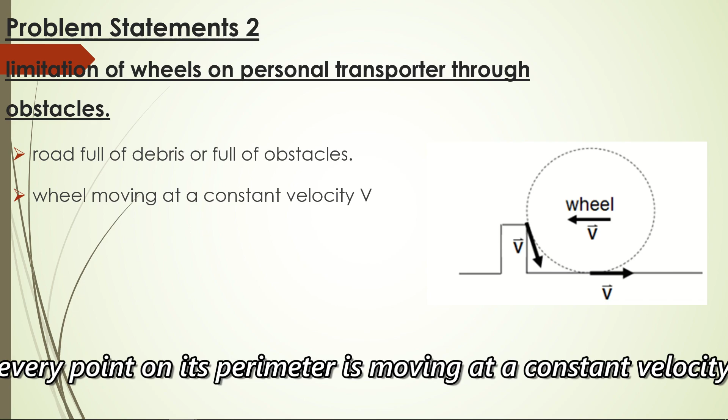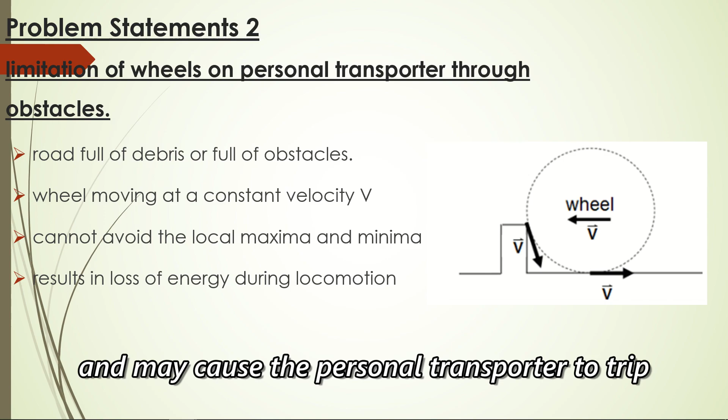In this case, the wheel cannot avoid the local maxima and minima and must move over the obstacles. This results in the loss of energy during locomotion and may cause the personal transporter to trip and cause severe injury. Therefore, it is very dangerous when a personal transporter is traveling at an average of 15 km per hour.

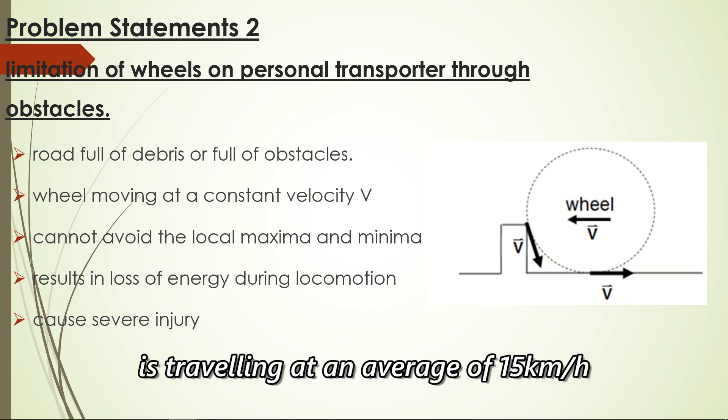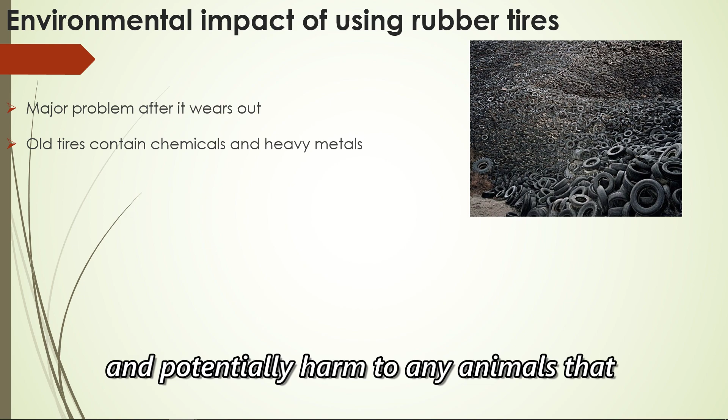Last but not least, the majority of the tires are made of rubber. Tires may be very useful to us as they help us to travel from place to place, but it may also be a major problem after it wears out. The biggest problem with discarding old tires is that they contain chemicals and heavy metals that leach into the environment as the tires break down, potentially harming any animals that come in contact with the poison water.

Besides that, some disposal sites have tried to get rid of old tires by burning them up. These processes not only release harmful chemicals into the air, but they are also extremely dangerous to the workers and the environment. Moreover, fires that are fueled by tire materials are harder to be controlled and extinguished than regular fires.

Therefore, we have to propose a great solution to solve this serious matter.

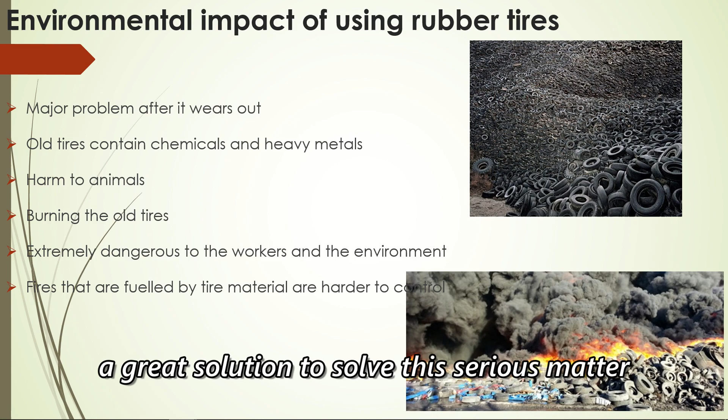Next, I would like to discuss the implications of the problem. Based on the previous problem statement, why do we select personal transporter to replace the use of vehicles? This is due to the negative impacts of vehicles.

First, harmful gas substances. Then, lack of accessible parking is also a major problem for vehicle users. Whether at airport, shopping center, or university campus, problems with parking are an everyday occurrence. Lack of accessible parking can hurt local businesses and decrease the quality of life. Traffic congestion is also a main negative impact as well.

With the help of personal transporter, the high mobility of personal transporter can be helpful on insufficient car park issues. Personal transporter is available to carry into your office and houses and store it somewhere until you are prepared for your next destination. Other than that, the fuel consumption of personal transporter is zero.

Hence, the emission of harmful gas substances will be resolved. The existence of personal transporter will reduce the number of vehicles and efficiently resolve the traffic congestion problem.

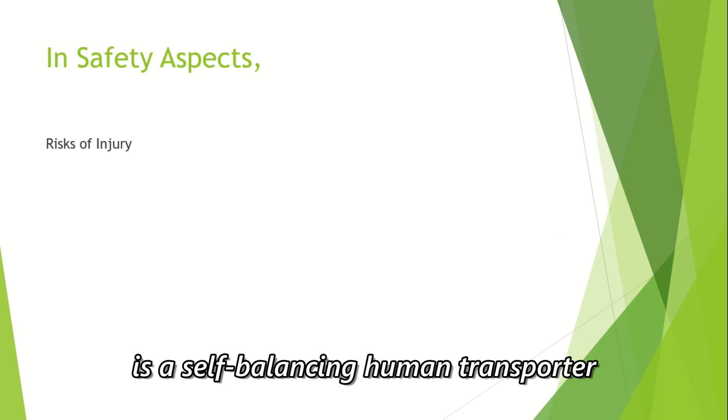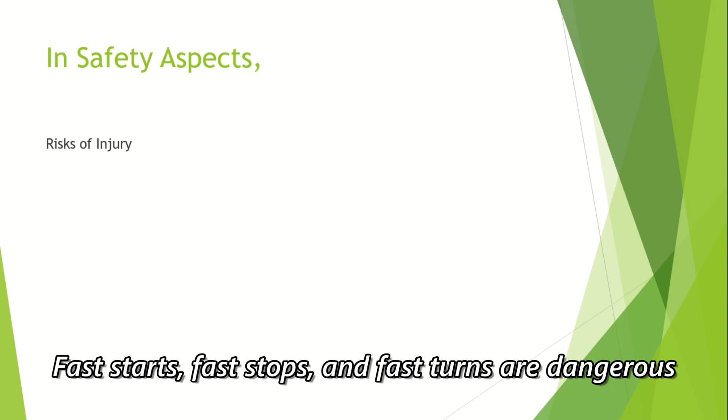In the safety aspects, the wheel mechanism of personal transporter is a self-balancing human transporter. Balancing technology cannot prevent injury if you do not ride it safely. Fast starts, fast stops, and fast turns are dangerous and can lead to a loss of control, collision, and falls.

According to a George Washington University study, personal transporters are impressively dangerous. The study examined the medical records of 41 patients who were admitted to the emergency rooms at University Hospital from 2006 to 2008. It noted a steady increase in injuries every year. The risk of injury is high, such as traumatic brain injury, facial fractures, fractured tibia, fractured clavicles, ribs, ankles, and arm.

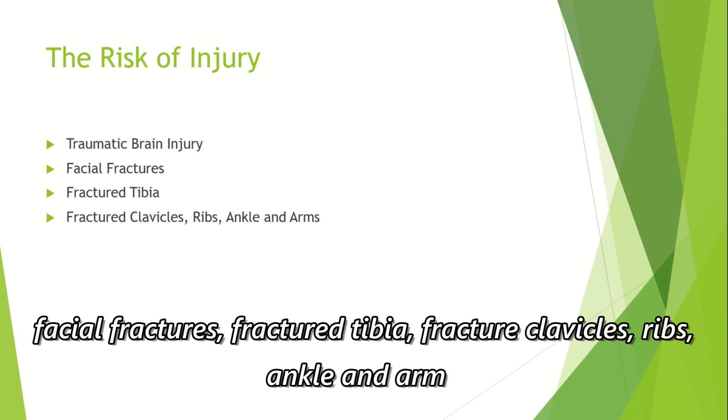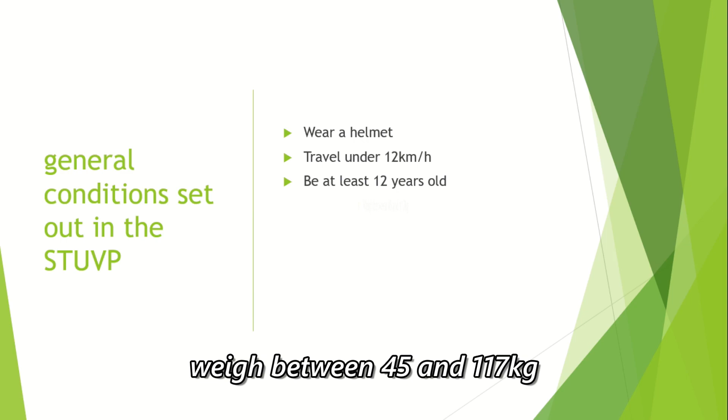Therefore, in order to ensure safety of riders, the general conditions in STUVP are listed. The conditions state the rider must wear a helmet, travel under 12 km per hour, be at least 12 years old, weigh between 45 and 117 kilograms, have a blood alcohol content of 0, and be a height so that their elbows are at least as high as the Segway's handlebar when standing on the platform.

Meanwhile, based on the safety issues of personal transporters, different countries have different restrictions and regulations imposed on the use of double-wheel personal transporters. In Singapore, the speed limit on sidewalks is up to 15 km per hour, and on cycleways speeds are up to 25 km per hour, while pedestrians are given the right of way.

Devices must be fitted with lights or the rider must wear a luminous jacket. They are not allowed on the roadway.

Besides, in the United Kingdom, the use of these devices on sidewalks is banned under Section 72 of the Highway Act 1835. With reference to its use on the carriageway, it probably falls into the category of motor vehicle, defined as a mechanically propelled vehicle intended or adapted for use on roads by Section 136 of the Road Traffic Regulation Act 1984.

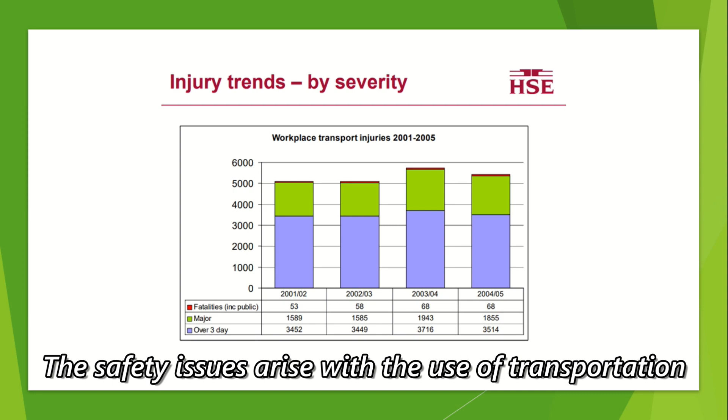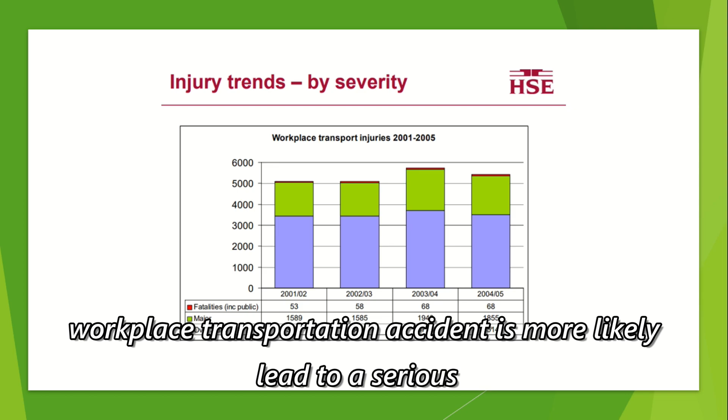The safety issues arise with the use of transportation, which includes personal transporters, in the workplace. From statistics, we might find that workplace transportation accidents are more likely to lead to serious or fatal injury, with a gradual increase in fatalities to workers.

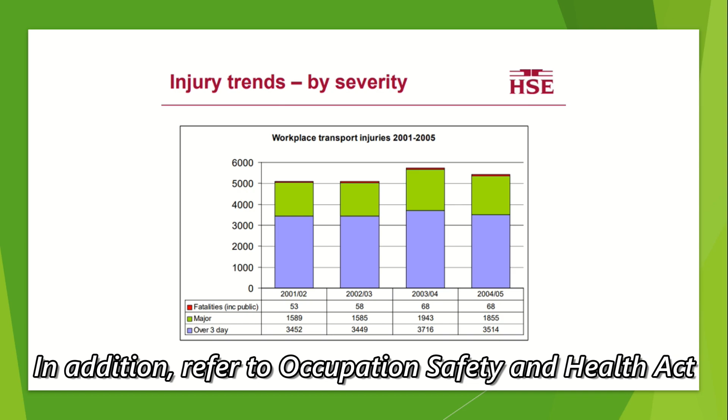In addition, referring to the Occupational Safety and Health Act, it shall be the duty of every employee and employer to ensure safety, health, and welfare at the workplace. The ideal workplace should be well lit, and traffic routes should be well laid out and clearly defined, free from blind corners and obstacles, with a stable and level surface.

Meanwhile, the US Department of Health and Human Services has identified steps employers can take to protect their employees and their company: keep workers safe on the road. Prevention strategies for employers include providing information on crash prevention and vehicle safety programs.

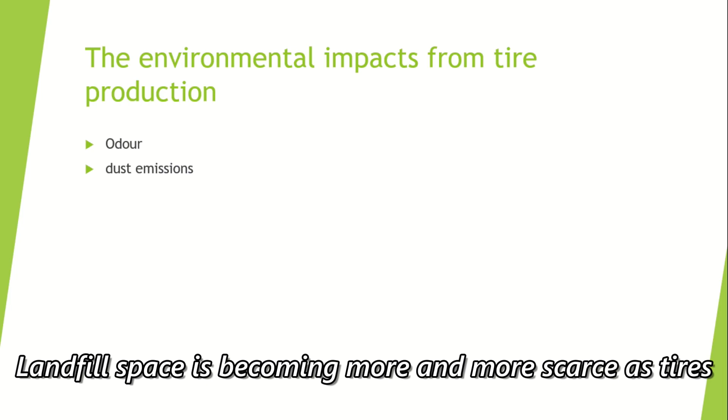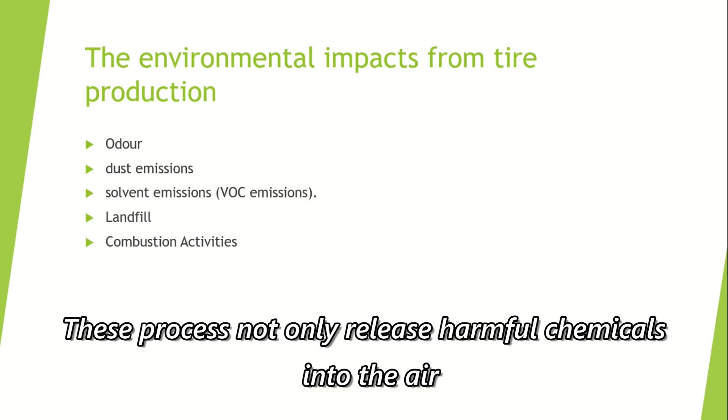The environmental impact of tire production includes odor and solvent emissions. Landfill space is becoming more and more scarce as tires do not biodegrade and take up significant negative space. Some disposal sites have tried to get rid of tires by burning them, either through open or controlled combustion. This process not only releases harmful chemicals into the air, but is also extremely dangerous.

These combustion activities cause air pollution, posing a health and safety risk not only to the environment but to the public as well.

In March 2010, the government launched a process to develop a national environment policy. The objectives of the policy are to provide direction to both public and private sectors, to ensure the integration of all policies, and to clearly articulate and communicate national environment commitments and priorities in a transparent manner.

So, after discussing the implications of the problem, now we want to decide which leg mechanism to be used. There are so many types of leg mechanisms in the world, but we will only discuss three today.

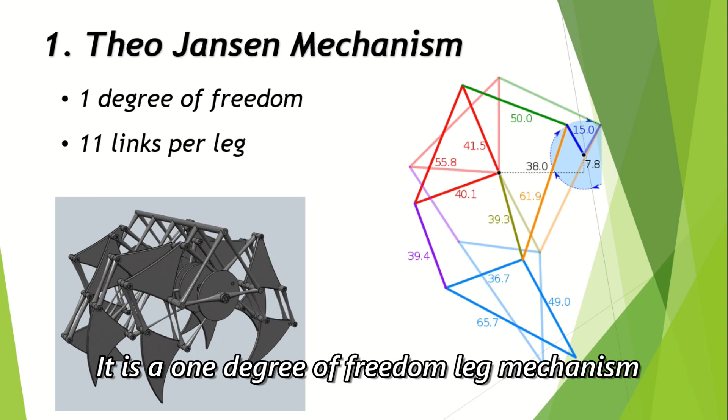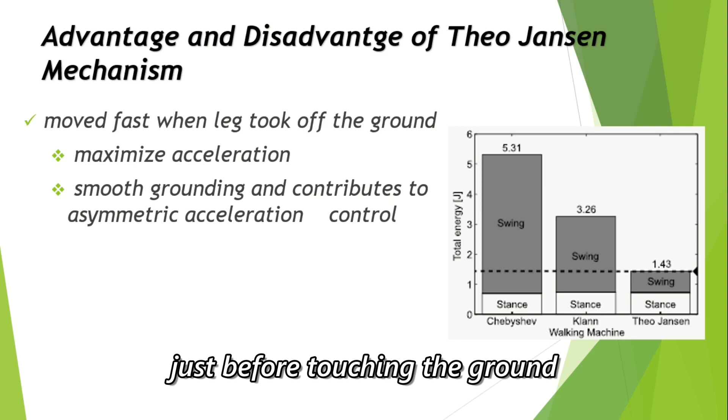First is the Theo Jansen mechanism. It is a 1 degree of freedom leg mechanism and consists of 11 links per leg. The Theo Jansen mechanism moves fast when the leg moves off from the ground and maximizes the acceleration just before touching the ground, which provides smooth grounding and contributes to asymmetric acceleration control.

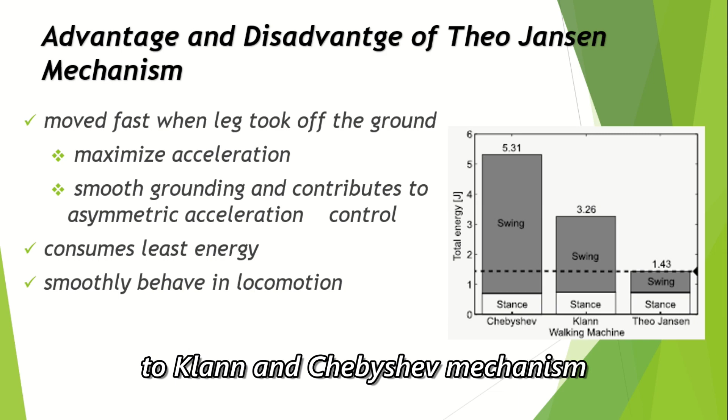It also consumes the least energy when compared to the Klann and Chebyshev mechanism. However, it can only work on even surface and terrain.

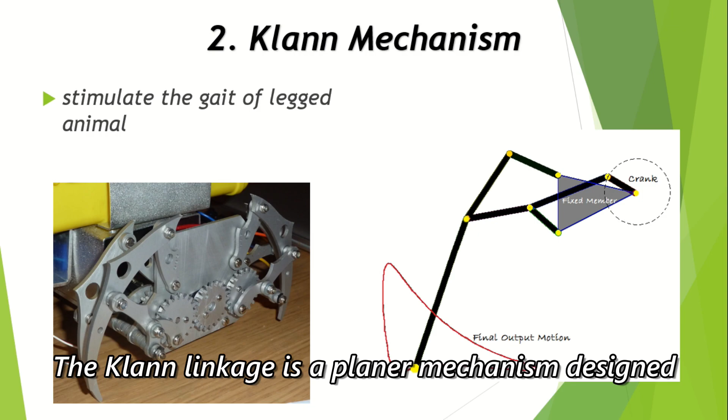Second leg mechanism is the Klann mechanism. The Klann linkage is a planar mechanism designed to simulate the gait of a legged animal and consists of 6 links per leg. It has the highest average velocity compared to others.

From the acceleration analysis, it shows that the Klann mechanism moves fast when the leg takes off from the ground and maximizes the acceleration just before touching the ground, and the acceleration vector may turn to the opposite direction for braking inertial force and preventing a large impact of the leg on the ground.

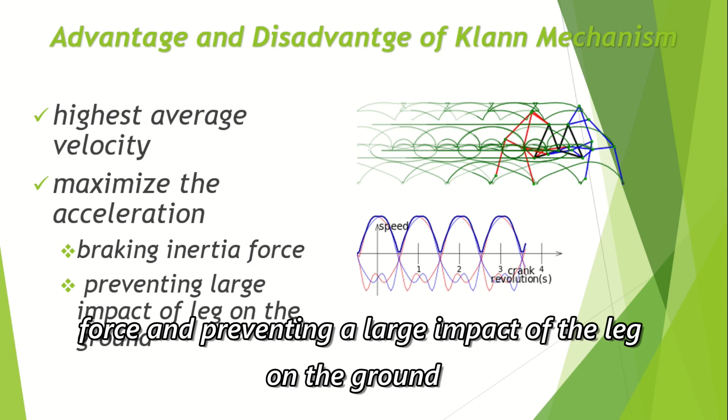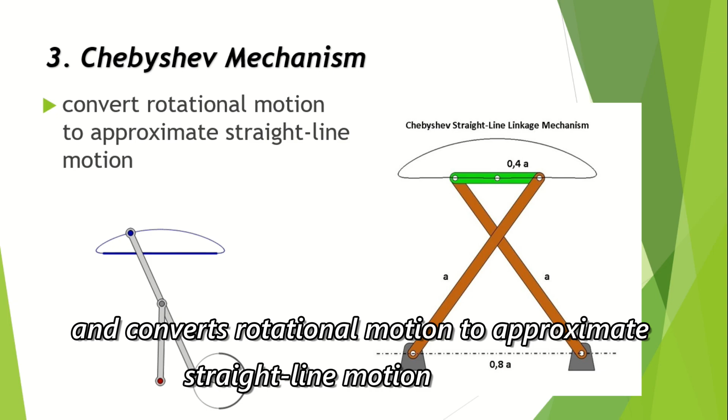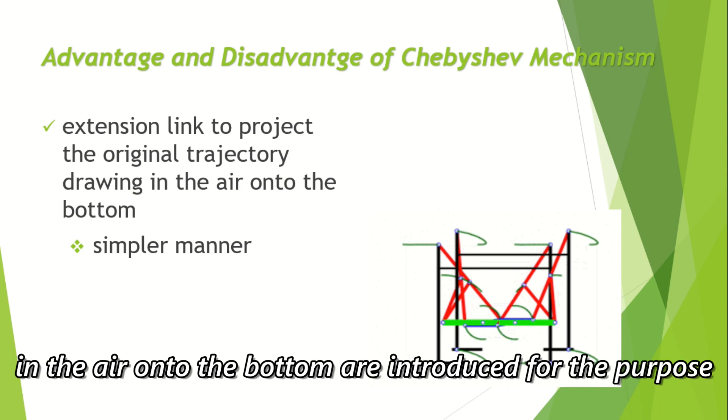Lastly, the Chebyshev mechanism is the last choice. It is known as a 4-link mechanism and converts rotational motion to approximate straight line motion. An extension link to project the original trajectory drawn in the air onto the bottom is introduced for the purpose of comparison with the other 2 mechanisms in a simpler manner.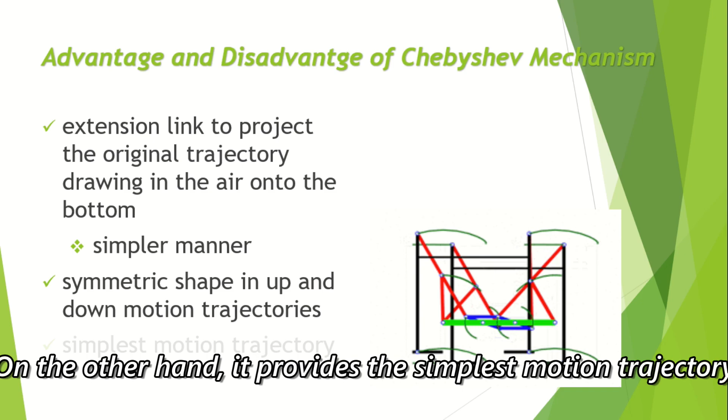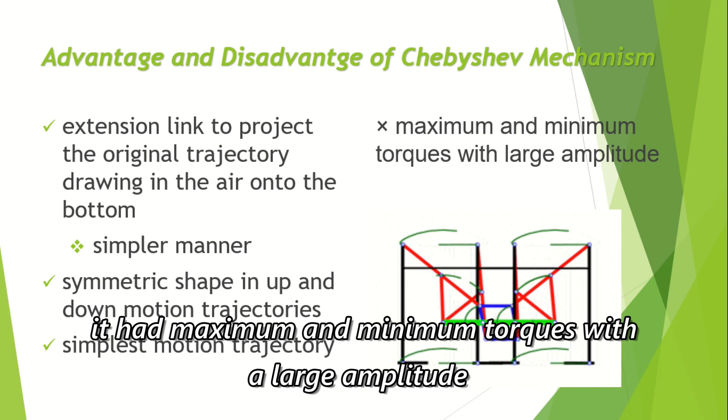It had a symmetry shape in up and down motion trajectories. On the other hand, it provides the simplest motion trajectory in the sense of fewer dimensions for achieving a function of walking. In the torque analysis, it had maximum and minimum torque with large amplitude, which the range represents the energy consumption.

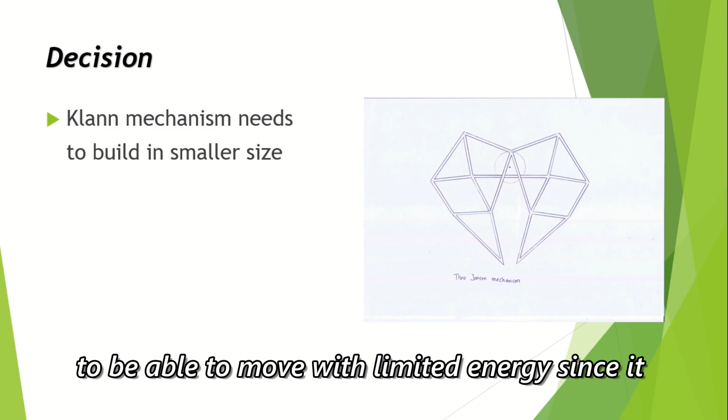As a conclusion, all 3 mechanisms have their own pros and cons. The Klann mechanism needs to be built in smaller size to be able to move with limited energy, since it was initially designed as a system to mimic insect motion.

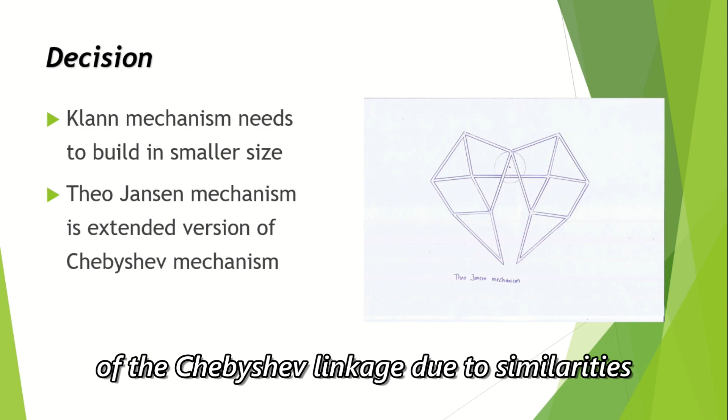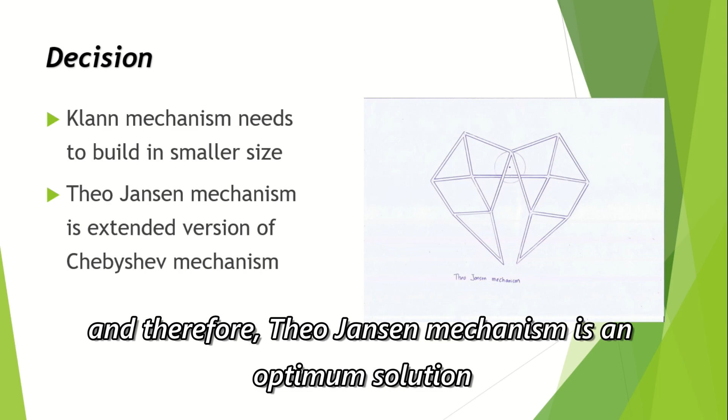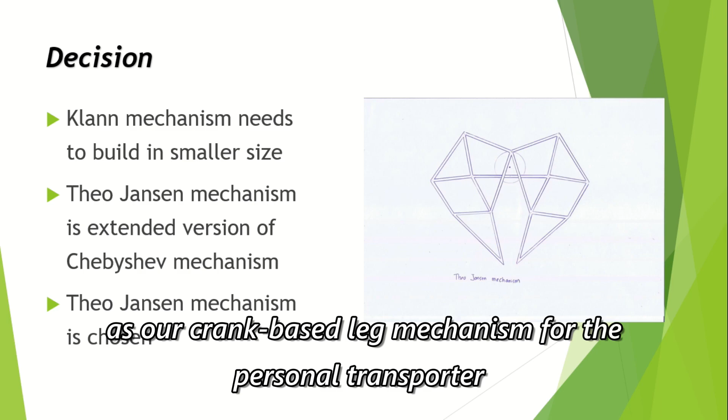The Theo Jansen is considered to be an extended version of the Chebyshev linkage due to similarities of basic velocity and acceleration profiles, and the existence of additional peak position. Therefore, the Theo Jansen mechanism is an optimal solution as the linkage specialized for walking smoothly. Hence, we will choose the Theo Jansen mechanism as our crank-based leg mechanism for a personal transporter.

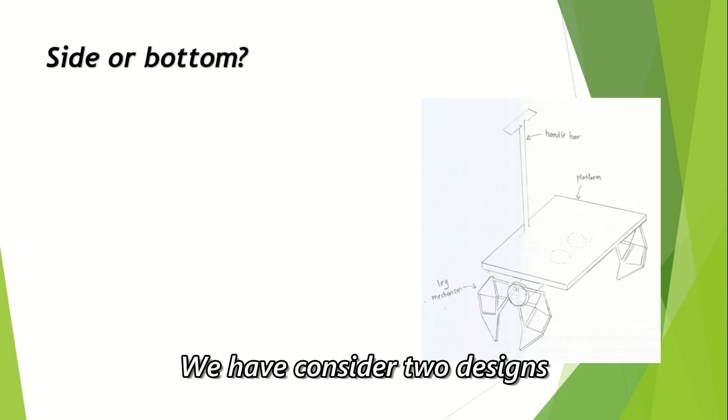After deciding the leg mechanism, now we have to choose the design of the personal transporter. We have considered 2 designs. One is to install the leg mechanism under the platform, another is installed at the side of the platform.

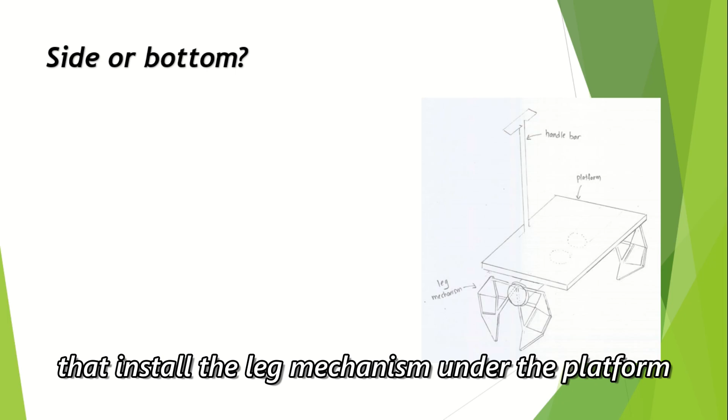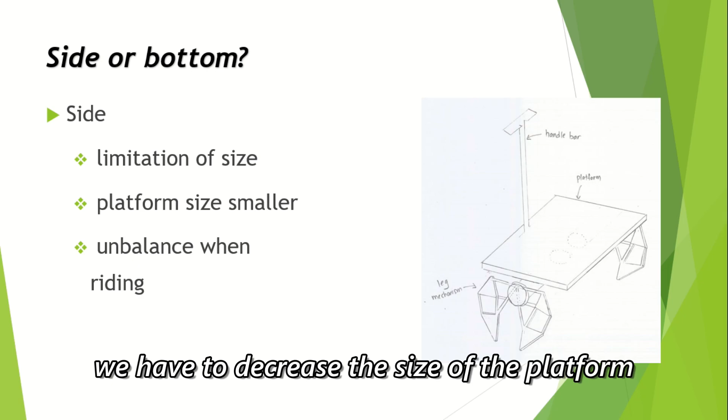After some discussion, we have come to a conclusion that installing the leg mechanism under the platform is a better choice. It is because of the limitation of size. If we install the mechanism at the side of the platform, we have to decrease the size of the platform, which will cause unbalance when a passenger is riding on it.

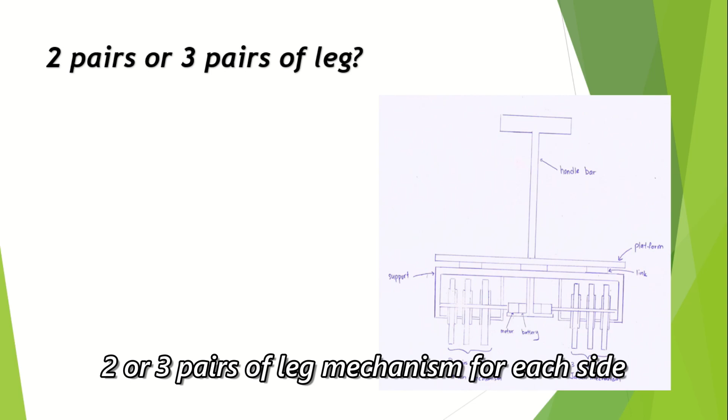Another problem is whether to install 2 or 3 pairs of leg mechanism for each side. The benefit of 2 pairs is being able to save cost, but in order to maintain smooth motion, 3 pairs are the better choice.

Now, I'm going to talk about the impact of personal transporters on multicultural society. The Segway personal transporter has been used in some countries for the purpose of safety, mobility, and time saving, but it is also costly.

The Segway personal transporters are used frequently in the United States as they want to give a big boost to the community-based policing effort citywide, increase the amount of police officers in downtown areas, and also enhance the patrol coverage of special events and large parking garages.

Besides that, the use of personal transporters simplifies the workday by dramatically improving the mobility and efficiency of commercial workers traveling indoors, outdoors, and across vast facilities in the US.

As for Malaysia, people don't really use the Segway personal transporter as it is expensive and not suitable for town use, since town areas have busy traffic. One purpose the personal transporter is used for in Malaysia is tour guidance, especially in Putrajaya, where it has many sightseeing spots.